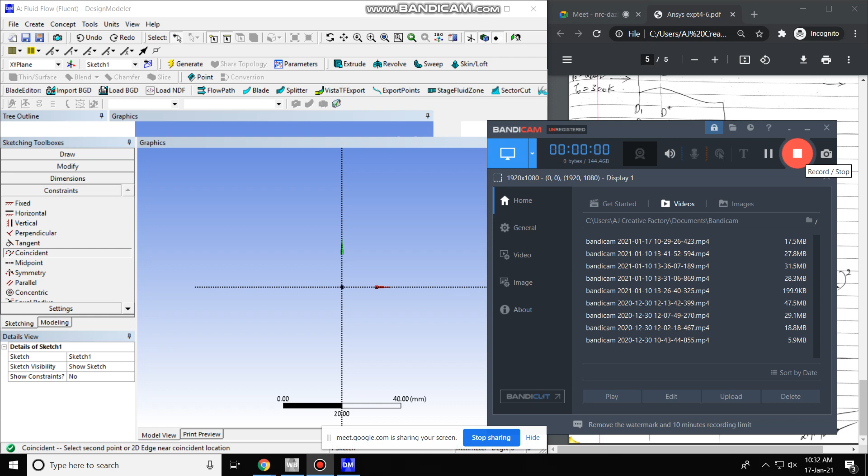Okay, so let us do a 2D nozzle. Now come to the DesignModeler. We'll take draw, line draw, and draw 3 lines.

Before that, set the units to millimeter and then draw the first line. See that a V should come - once you see the V, that means the vertical is fine. Now again vertical, and connect these three.

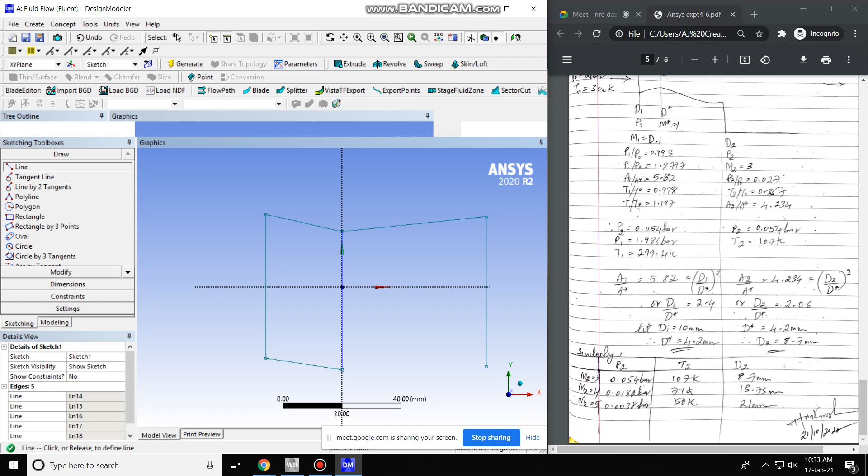So again connect these lines like this. Here and here, and here and here, and here and here.

Before you dimension, take vertical from this point to this point, and then this point to this point. Okay, and then take the general dimension from this point and this point.

Okay, first that is 10. This should be 5, correct. So D1, that is the inlet, is 10, so this should be 5. And then V6 should be 10. Okay, now we are fine.

And then we have the other end, that is 8.7, so let us take it as 9 on the outer. Before you write that, first adjust this one - so that will be 4.5 and this will be 9.

All right, now we have to dimension this point. In general, you don't need to do midpoint here because you've done midpoint for the other one. So this will be 4.2.

Okay, and then you can still set it to midpoint, but let me set it to midpoint. Undo this and take vertical distance from this to this. You cannot - that will be over dimensioning, correct? So...

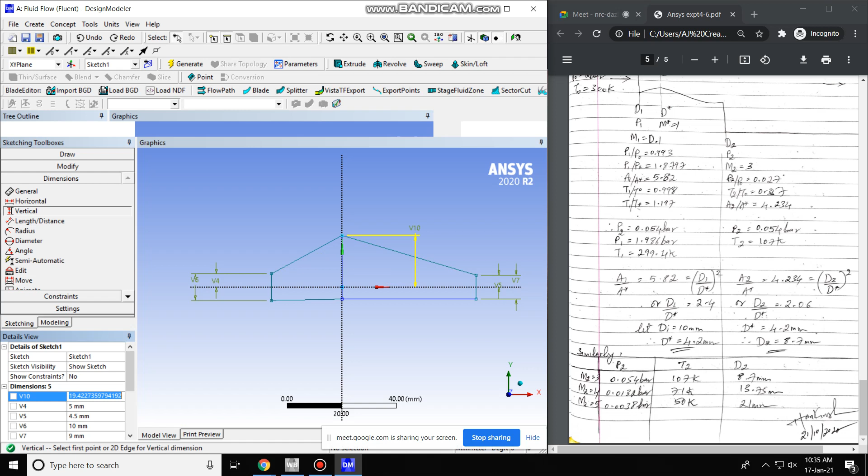Let me just still try, because this is fixed, so that is by 1 second. Let us remove that - that was fixed - and take vertical from here to here. Let us take it as 4.2, that will be 2.2.

Okay, and once you're done, what you do is delete. I think we can't - that will be an over dimension again. Yeah, there's an over dimension, so that will automatically be 2.2 and 4.4. So it is still the same.

What I'll do, I'll delete V10 now. Selection tool. V10, and this I'll set it to 4.4. Okay, anyways, I think it won't move.

And the horizontals are also - let me just check the dimension from here to here. Even this will be constrained if I just try to draw this one. I think this is constrained from here to here. Oh no, it is not constrained.

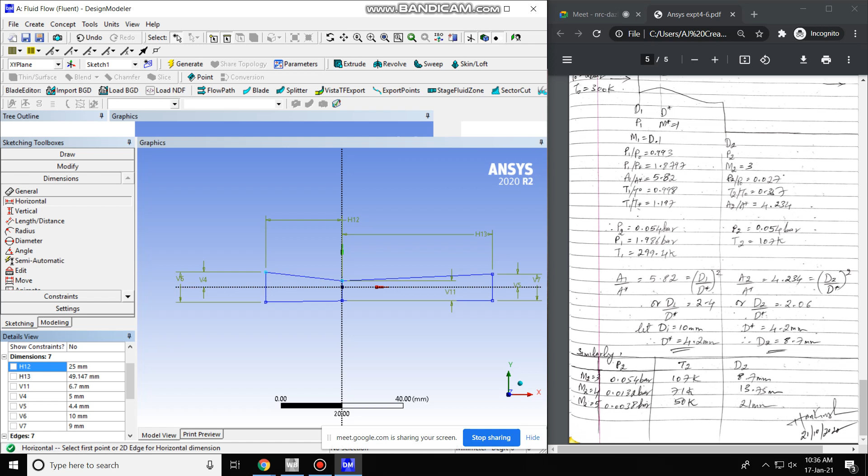I think there is no necessary action for what the length should be. Let me just still check it out. Okay, let me just take this to be - I'll make an approximation now for dimensioning. Let this be 25, and this be double of it, 50.

Okay, and my only concern is this is not exactly the center. Let me just try to do another relation. I'll just delete this, okay, and then go to constraint and midpoint.

Midpoint of this should be on this. Without the dimensioning, I think that won't work - let me just check. So let us keep the dimension and check. Okay, it's not constrained, okay.

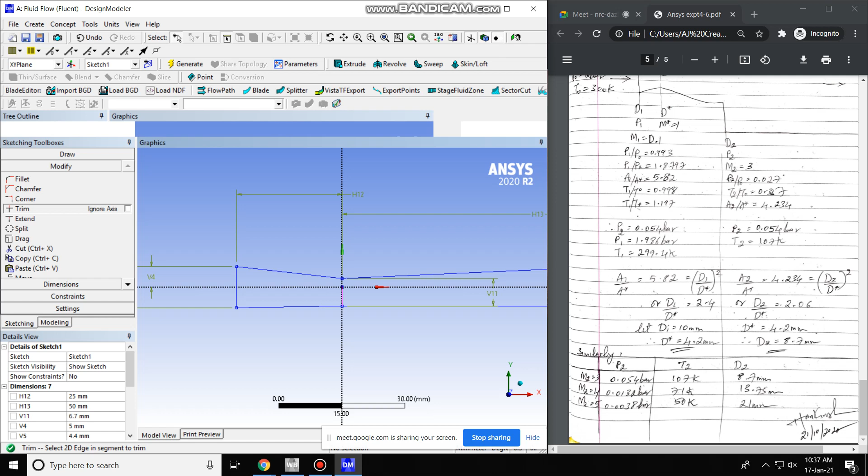Anyways guys, so let us leave it this. All right, now what you do is just delete the center line - modify, trim the center line. You don't need the center line. Okay, now we'll come back to modeling.

Then go to concept, surface from sketch, this sketch, apply, generate. We have a 2D nozzle designed. Once we have our 2D nozzle designed, let us go to sketching.

Sorry, we have to name the selection - the tool, name selection, and edge selection. This is your inlet. Okay, apply and generate. Name selection - this is your outlet, edge selection, this is your outlet, apply.

And then comes the wall. Name selection, edge selection. Select edge 1, 2, 3, 4. Outlet... oh sorry, that is not outlet, that is wall. Give it a wall name, okay, now this and apply. So these are the walls.

If you guys have any other geometry to design this, but keep the area same - that is the diameter same - then you can design it. This doesn't mean that you have to follow my procedure only. If you have any other method, this is still a 2D nozzle, so don't worry - you can design in your own sense also. Now this is done, let's close this.

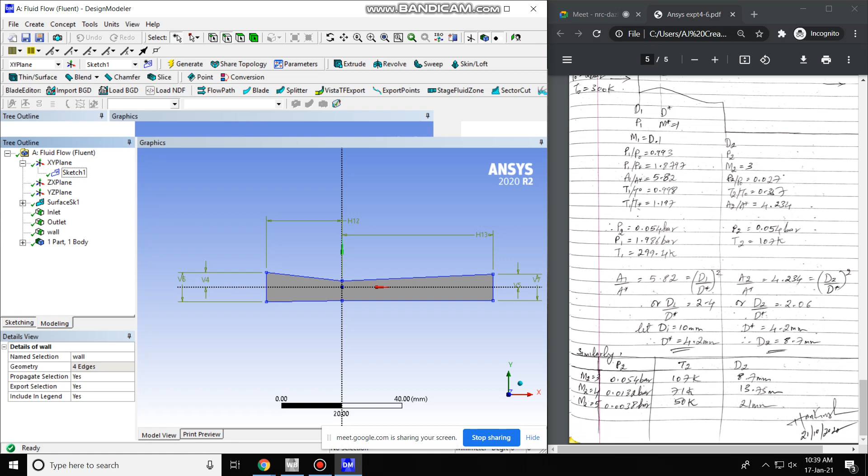Let's go to mesh. Again, this is a student version, so a lot of the options are not available.

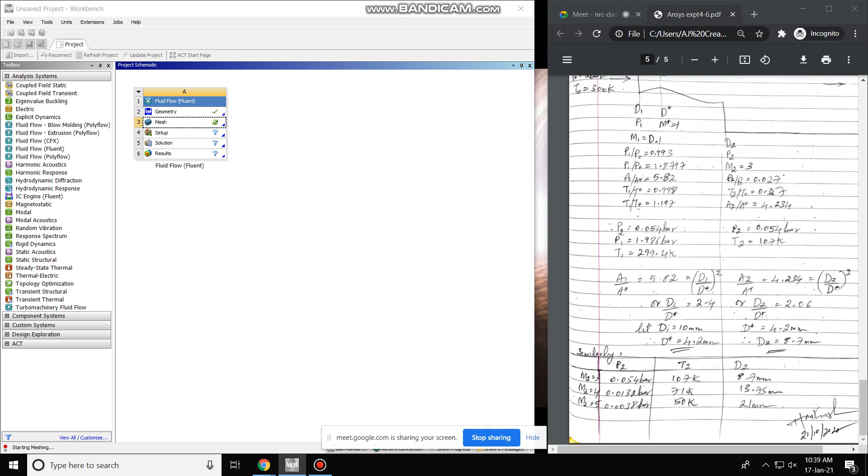Okay, once you're in the mesh, let it load. It's still loading. Come to your front view. Okay, that's this.

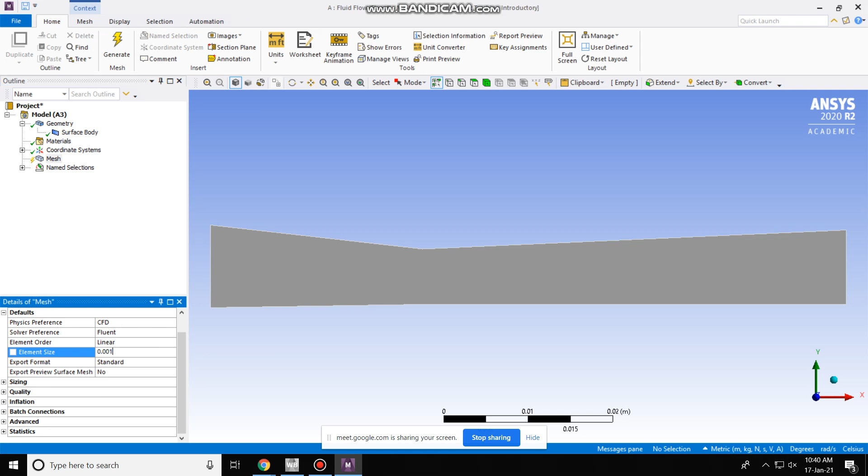Meshing - the only thing you can set here is the element size. Let me check with 0.001 m element size and then generate. Okay, it is not that good. I'll take 0.5, generate.

I think, let me just see if I can see 1/10 of 1 mm. Be careful with your computer RAM speed - if your RAM is very less, this will take forever or it won't mesh at all. It is not working, you can stop here by clicking red. I'll take 0.0003, then let us see.

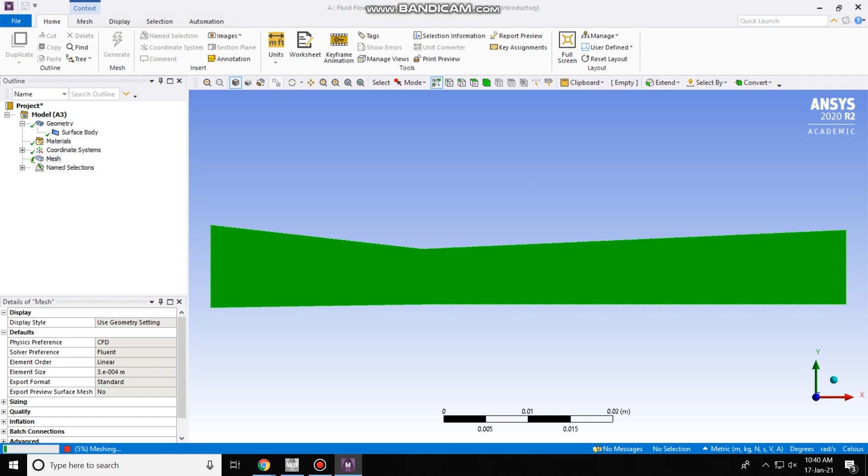Okay, this looks good, right. So now the mesh is done. If you want, you can use any other properties.

You can insert sizing, face mesh, and inflation layers if you want - if you want inflation layers at these edges of the geometry. One second, I think there's no selection in here. Inflation.

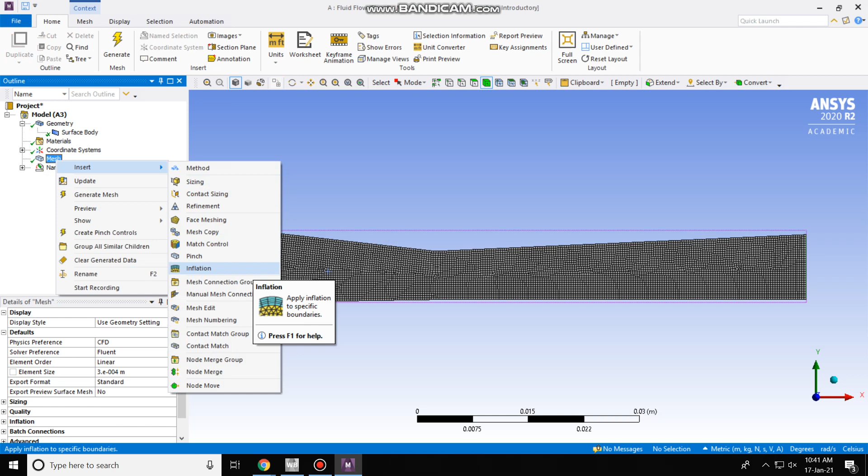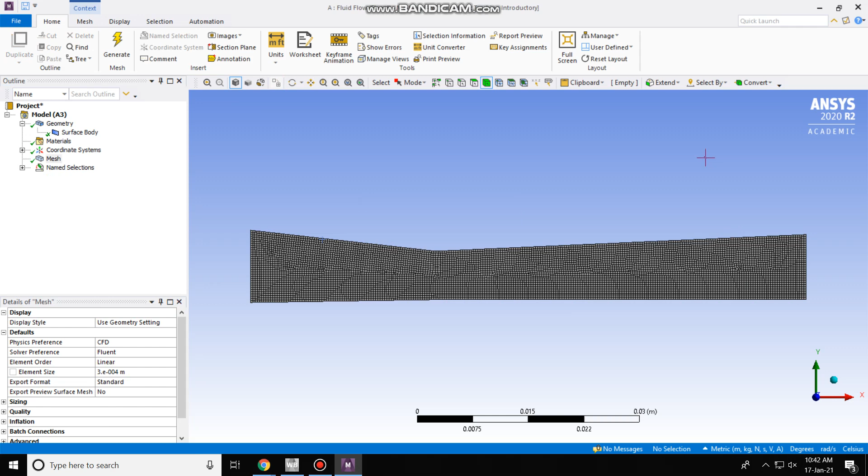You're supposed to select only one line. Okay, here, sorry, right selection, geometry, let us - I'm not getting an edge selection here, so let us discard this. This should be fine, okay, let us go to our next step.

And right click and update until you have a green tick. Don't update here because if you update here, it will start the solution process also. Just click on the mesh, right click, and update.

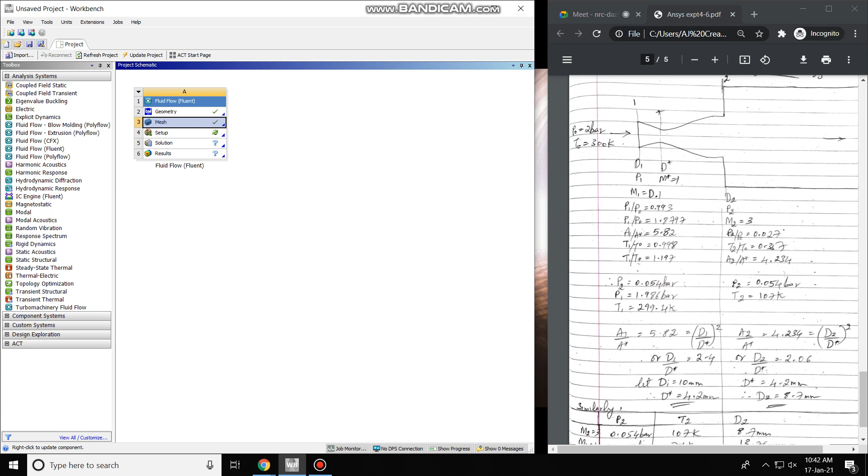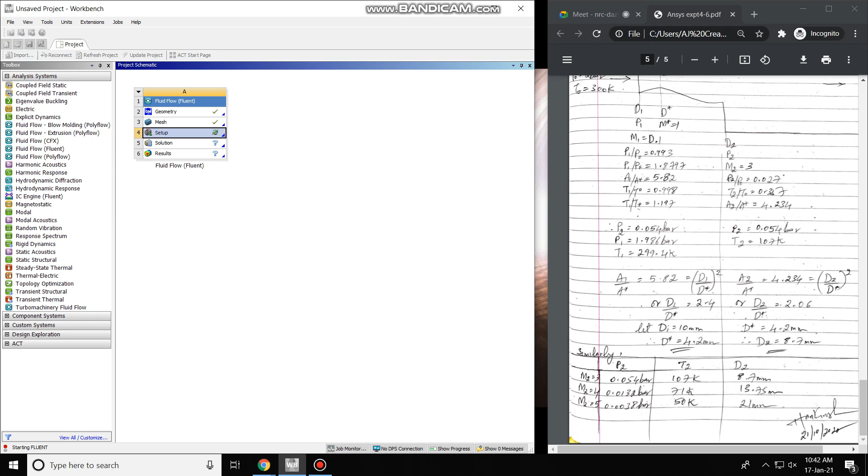The total pressure is 2 bar and total temperature is 300. And then gauge pressure - let us go in and pick up. Click on double precision - it is obviously 2D. Start.